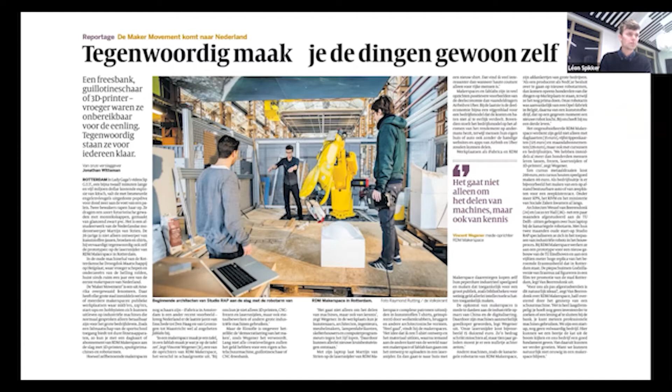And even though I've moved on to new things 2 years ago, I still think these guys are really doing great work, and I would recommend anyone to check out their stuff a bit later on, or if you're interested in doing an internship or working there, to get in touch with them. So let's run through some of the projects to show you what computational design and robotic fabrication can do.

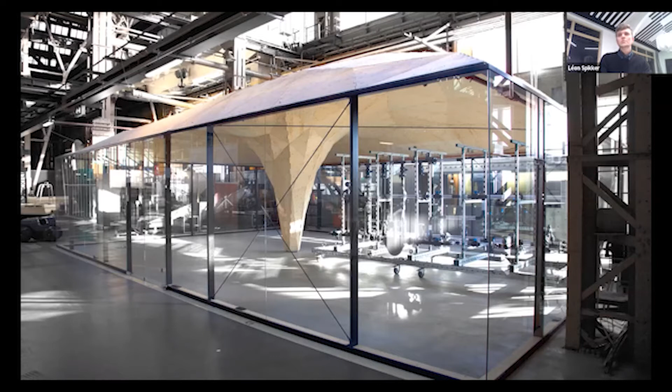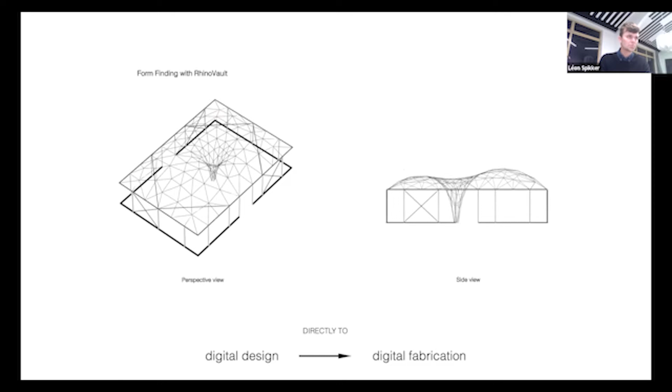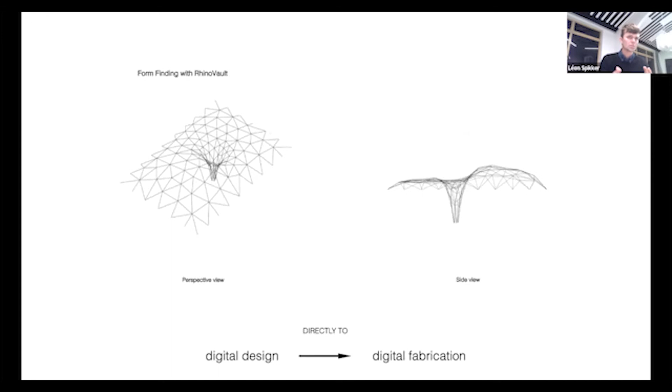The design and fabrication had to be tied into each other. This is sort of the dogma that we worked within, where the roof is generated from a shell structure and then rationalized and brought back into panels that could be milled with a robotic arm. You can see that here in the video. So really the structure and the material go hand in hand here.

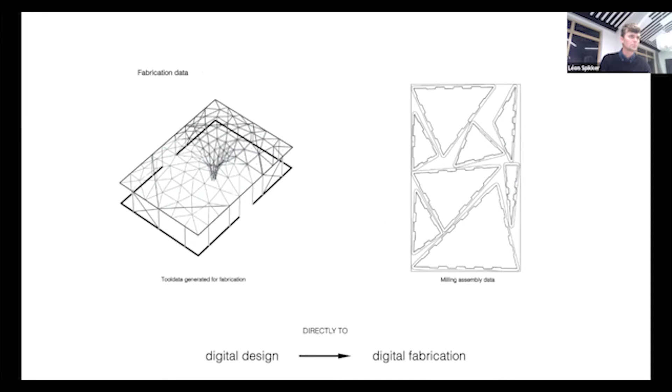So the structure is generated using RhinoVault. It's a plugin from the ETH in Zurich to create compression-only vaults. And the system relies on the traditional finger joint for improving structural performance and easy assembly.

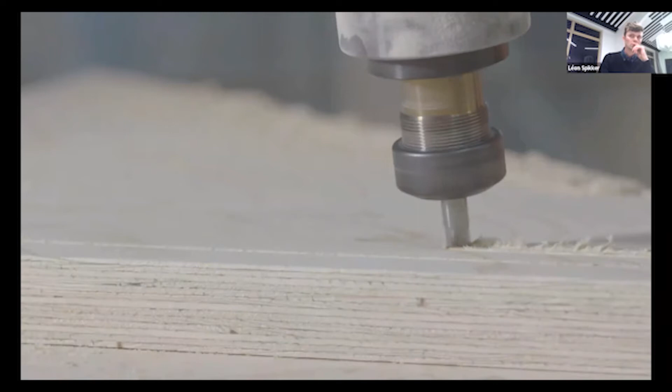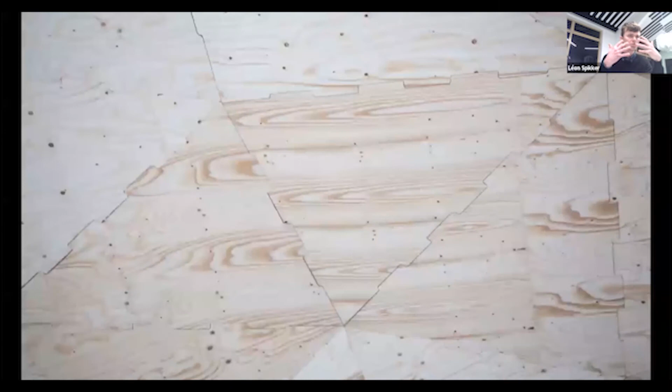We produced it ourselves with another second-hand robotic arm that was suitable for milling. We milled about 350 unique panels that together create this load-bearing structure, where the veneer of the wood is aligned with the highest resistance to stress.

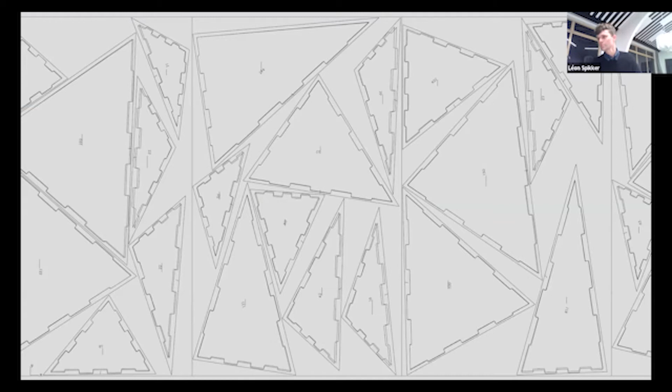That's also how we aligned the panels that we made within the stock material that we bought. So all of these things were done computationally directly from a parametric model of that vault. It took us a couple of months to manufacture and then assemble into this domed structure.

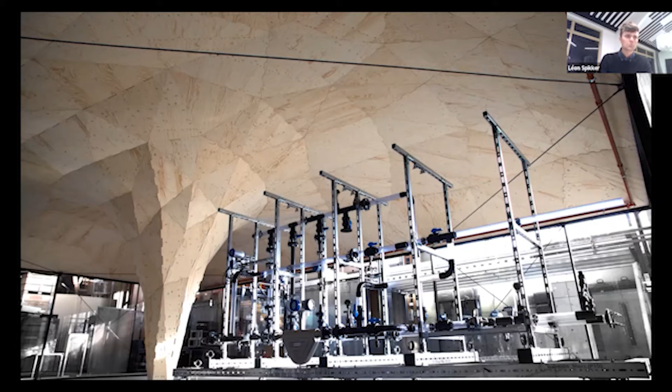The result is really quite a small building, but for us it was the first project in which we could actually prove that there's a huge potential in combining designing and making into one firm, and also bringing manufacturing forward into the design process - taking these constraints and material properties into account when designing, so not leaving them as an afterthought.

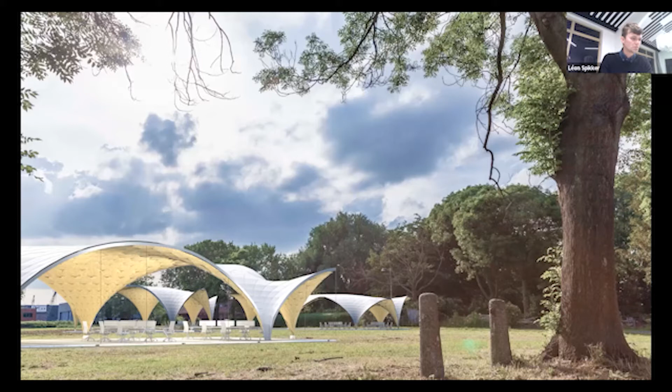This is a project that we did for the Port of Rotterdam Authority, and they had another project later on. This really showed to us that these digital tools are not just nice because they have an undo button or it's easy to make changes, but also that these algorithms can be applied to new cases with relative ease.

So what you see here is another project for the Port of Rotterdam that unfortunately ended in the sketch phase, but we could easily whip up using the same algorithm. It showed us that there's value in creating a sort of toolbox of codes and of methods to design and produce.

So we went looking for a good way to approach that, and we found that during the making of their load-bearing structure, there was actually a lot of waste material lying around. It was left at the lumber yard, but marked as trash, and had quite a negative effect on the circularity score of the project. So we thought it would be nice to use that larch and pine in the cladding of this project.

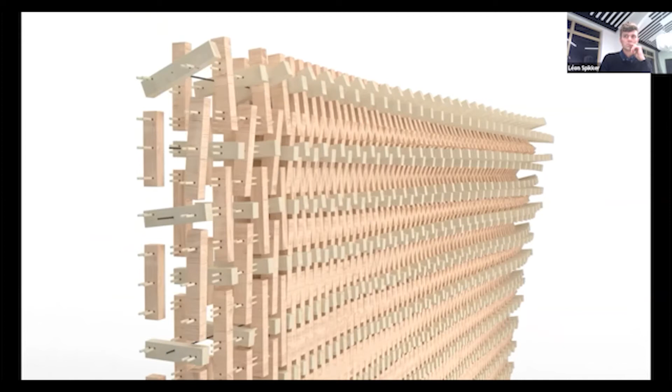So we devised a system that consists of traditional detailing, but not with finger joints, but with dowels - so without glue or screws, and actually just with wood and just a post-tensioning rod to keep these panels together.

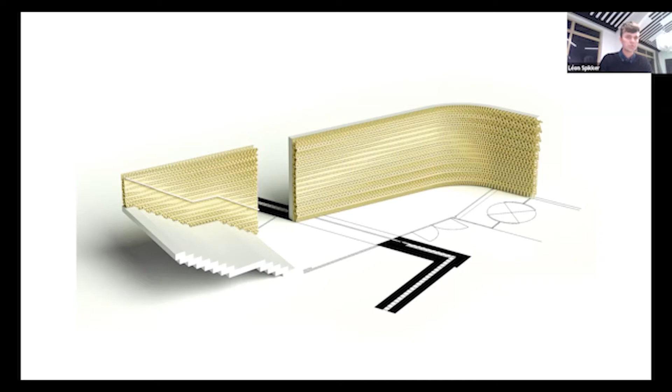Together, these panels would form a balustrade and wall cladding that would cover the gallery's entrance, and we would use the handrail to influence the parametric design of the wall cladding. So for us, this was really a way of pushing our control of robotic manufacturing to the limit. We went all out and devised a robotic fabrication process where the robotic arm, as a craftsman, handles these small battens of wood and goes through a couple of actions and then positions them on the right spot within this segment.

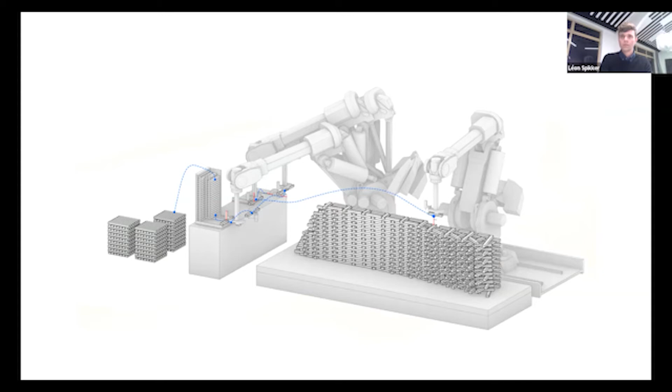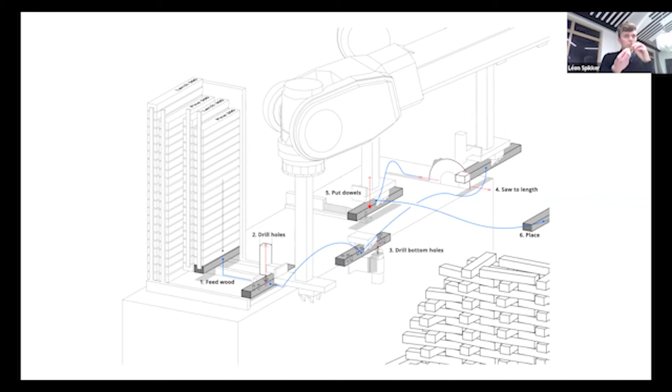So you can see that process here. It involves around 6 steps with different pieces of larch and pine, either 50 or 30 centimeters long, where they're drilled from top and bottom, they're sawn to length, dowels are introduced into them, and they're then placed on the right spot.

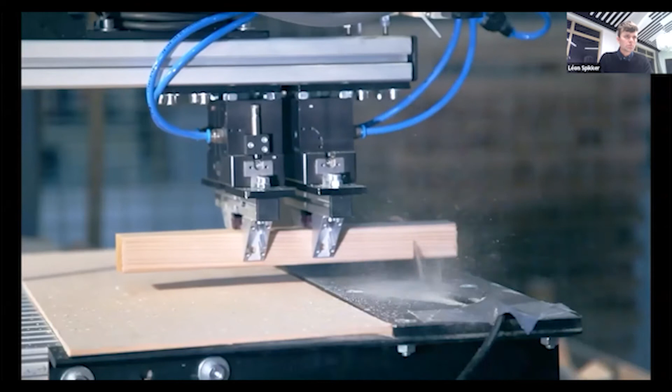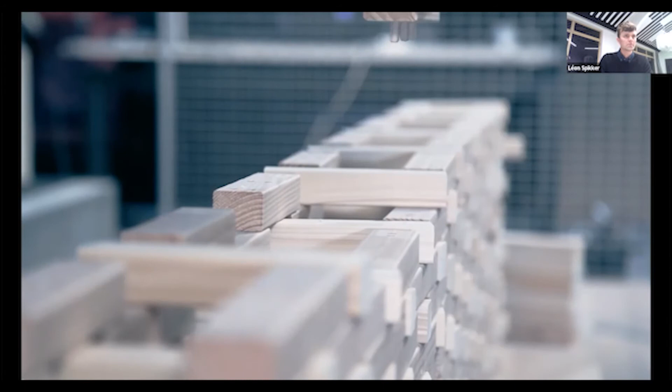The tools that you see here were also hand-built by us, mostly because this process isn't used in the industry at all, also because it's pretty laborious. But you can see a time-lapse here. These processes normally took about a day to complete. So the segments that you see in the end here are stringed together and put into the gallery space near the entrance.

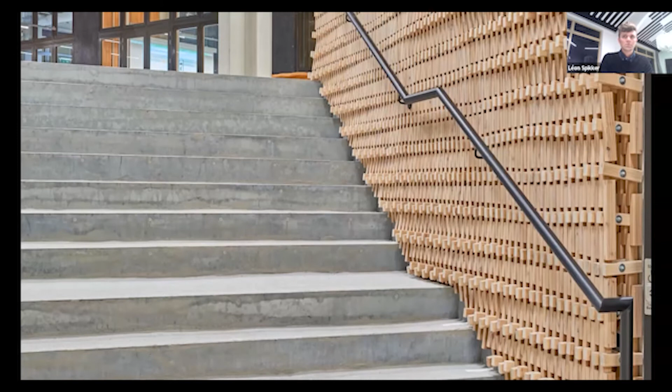And what I personally really like about this project is that it shows that waste as a material for building, or circularity principles, don't have to be boring or ugly, but that they can be used in pretty inspiring and aesthetic ways. So it's a unique piece of architectural cladding, which really wouldn't be possible without the tight integration of computational design and robotics.

So on such a small project, we really pushed what could be done with such materials, but we were ready to move on to some other materials as well. People really knew us as the guys who only work in wood. So when BPD Development approached us for a project, we didn't hesitate and hopped on it.

There's a project called New Delft Blue, where we were asked to design a couple of archways into a communal garden of a new residential complex. Delft is a historic town in the west of the Netherlands, known for its Delft Blue pottery, as well as the technical university where we had all graduated.

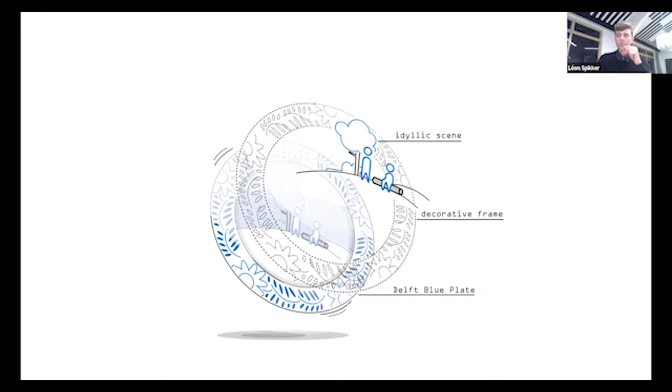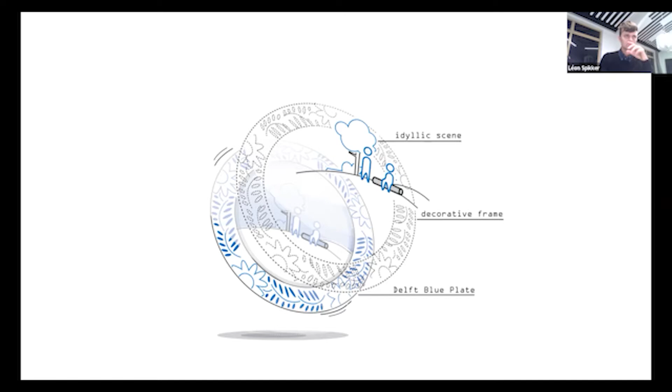We decided to reinterpret those two factors in the design. We started with the structure of the iconic Delft Blue plate, which contains a decorative frame, often natural or floral patterns, and then an idyllic scene in the center. Within the project, the gates actually already framed the idyllic scene, which is the lush courtyard in the middle.

So what we wanted to do was use the arch as a decorative frame for that, to guide the viewers inward, where we would make ceramic panels, 3D print them from clay with our robotic arms, to create a unique gate on every side of the building block.

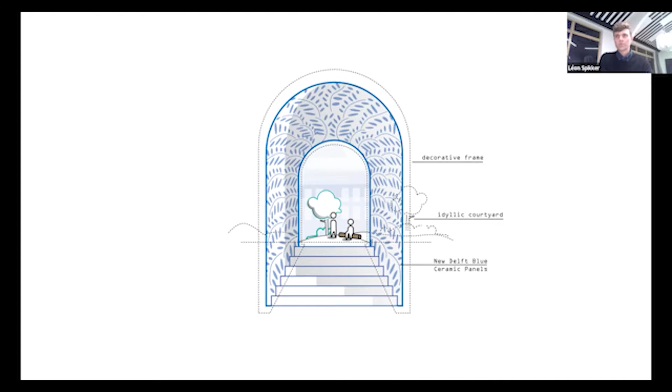So here you can see what that looked like. It's a custom extruder that prints panels of about 30 by 50 centimeters high. And all of these tiles could be produced uniquely. It doesn't really matter whether with 3D printing you print 1,000 times the same panel or 1,000 times a unique panel — the production time is pretty much the same. It's just in the robotic control and the design where you have to make that differentiation.

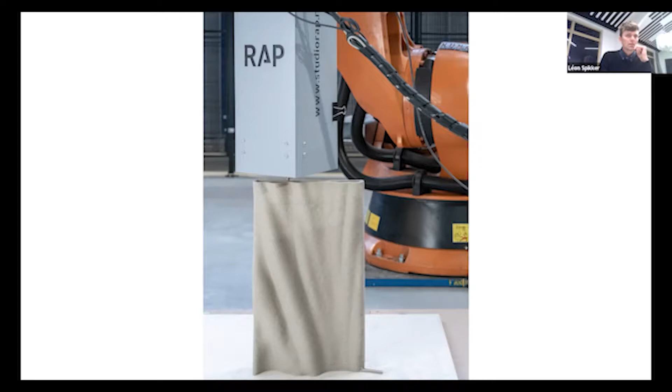So what we wanted to do is use that cheap form, or the way that we can achieve that form, to paint this floral pattern. Together with Royal Tichelaar, a very famous ceramics company in Holland, almost one of the oldest companies here, we developed a runny glaze that we could put on the tiles, and that would run into the valleys in between these hills that you see. We wanted to do that to create a sort of halftone effect between blues and whites, so we wouldn't have to hand paint the tiles to achieve this differentiation — the form and the runny glaze would force this effect.

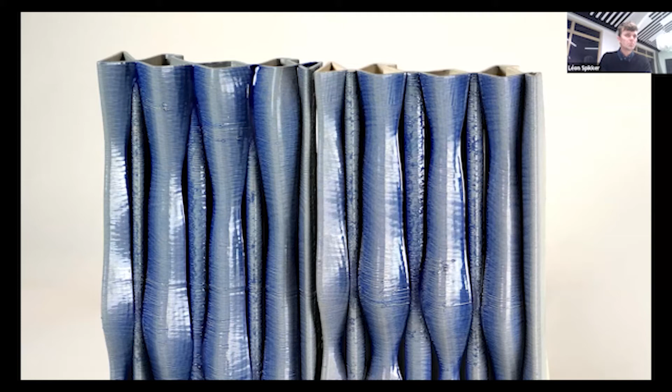And you can see that in these early prototypes that we made, the effect is quite visible and striking, and there is a nice accentuation of the print layer as well. So there's multiple layers of expression in it.

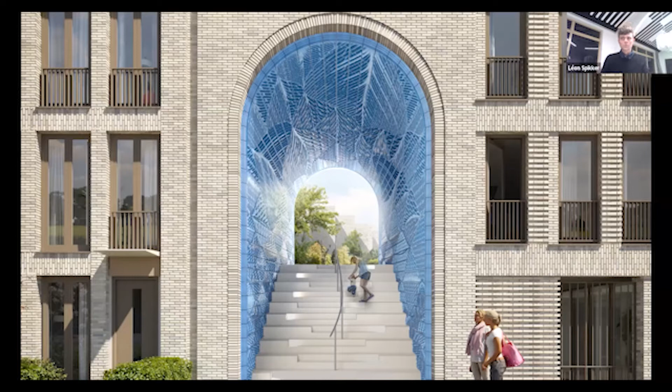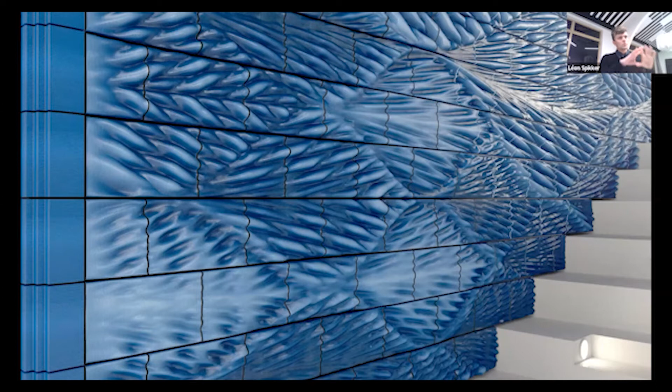For the overall design of the arches, we went with the floral patterns from Delft Blue, as well as some cues from the nearby waterways and canals that Delft is very well known for. It's just used to accentuate the entrance to these shared gardens. Here you see a detail shot of how these panels would be lined up, and how each of them uniquely contributes to this overall image.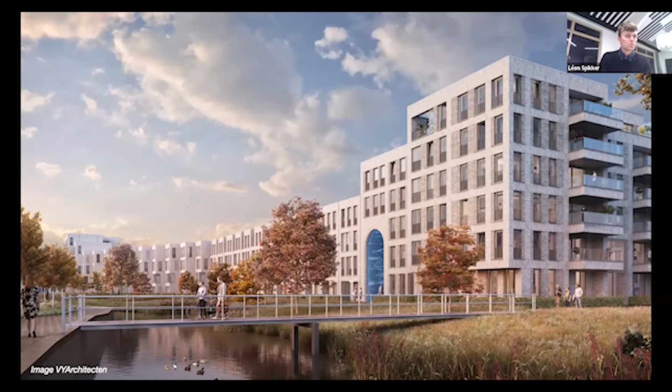So here's an outside shot of that building block and the small archways, and how it looked in the end.

So from that project on, we realized that we didn't just want to do aesthetically pleasing additions to existing buildings, and I was quite enthusiastic when we were asked to work on bus stops. This isn't really the thing that most architects would consider challenging or interesting, but with my background in industrial design, I thought that designing products for public space is actually a pretty neat thing to do.

What we wanted to do was look at how we could contribute to society a bit more with the tools that we had developed. So the assignment was focused on turning the generic bus stop in the Netherlands, which is quite a depressing place, into something more comfortable and large enough for the amount of users that actually use it.

So bus stops are maintained by, or placed and maintained by, advertisement companies, and they're not really interested in that. We found out that the physical infrastructure has a really big effect on bus usage, and that these low quality bus stops were actually keeping people out of buses and in their cars, where the province wanted us to do that the other way around, so get them out of their cars and into the buses.

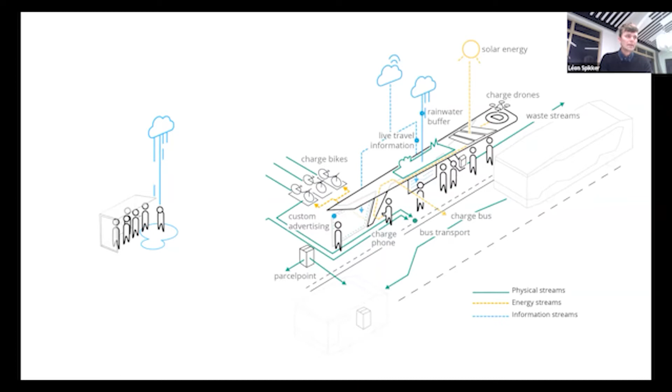And this is where we started thinking about the idea of a family of bus stops. So a design system that could adapt to all kinds of positions - rural, urban, suburban, anywhere in between, where services and amenities could be adapted to that specific location.

Rural stops would get electric bicycle charging or package lockers, while urban stops would be more compact, but had more information on what could be done in the surrounding environment, for example.

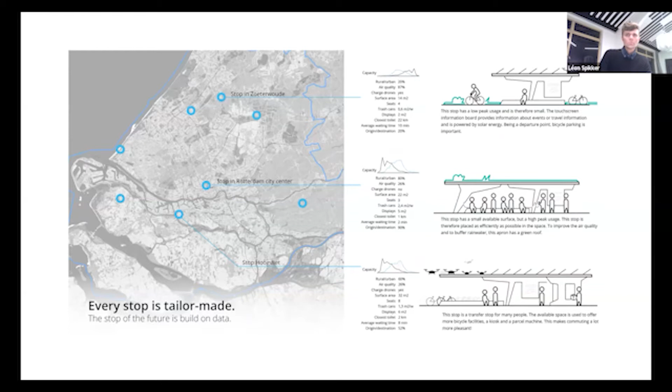We had a good test case on a plot near the Erasmus University that saw really large peaks in the morning and afternoon, but in the middle of the day, almost nothing happened. And this design system would adapt to that narrow plot and still cover about 350 people per hour.

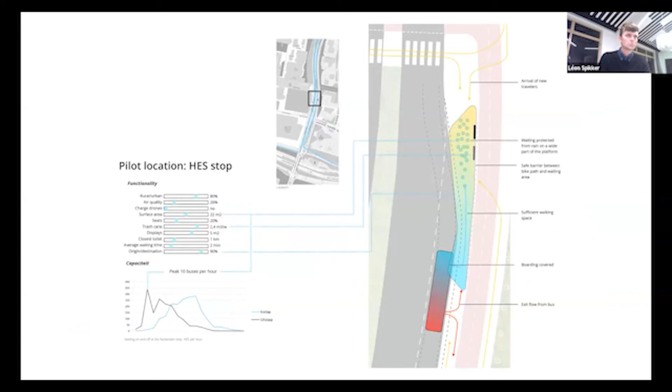So really big change. And we made a couple of modular and adaptable designs that could be made using robotic manufacturing methods. And they could be produced in different sizes for these different sites and containing these different amenities and services.

But unfortunately, when that bus stop got moved because the contract with the bus company was ended and the local government changed, the project fell through, but it put us on an interesting path because it brought us another project, which is the last one I'll show from my period at the RAP, but which is the 3D concrete printed Abri, which is also a sort of bus stop, but this time for the city of Rotterdam, so not for the province of South Holland.

And it wasn't about buses, but about water taxis. And they sort of stitched together the two sides of Rotterdam, so the north and the south. Rotterdam is cut by a river. And they also wanted to promote the use of that way of transport.

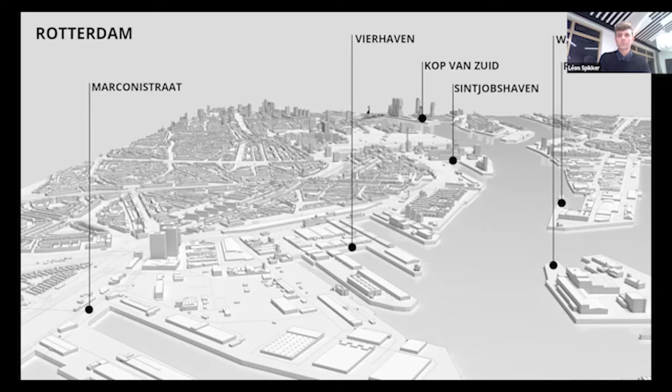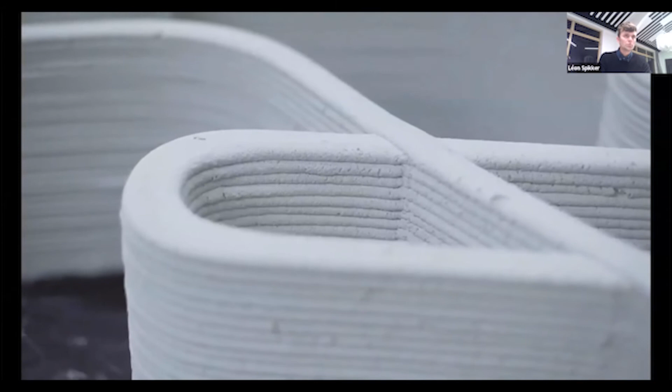And during that time, we had just started working with Bruil, which is a large concrete manufacturer that was starting to use an experiment with 3D concrete printing. We had been working with them to develop some software for them to do that. They had seen our project with robotics, like Circular Experience and Scaled In, and had asked us to make some first software tools for them.

And we wanted to apply this new technology in a project, because similar to the ceramic 3D printing, you could make unique objects at pretty much the same cost as you would a mass-produced one.

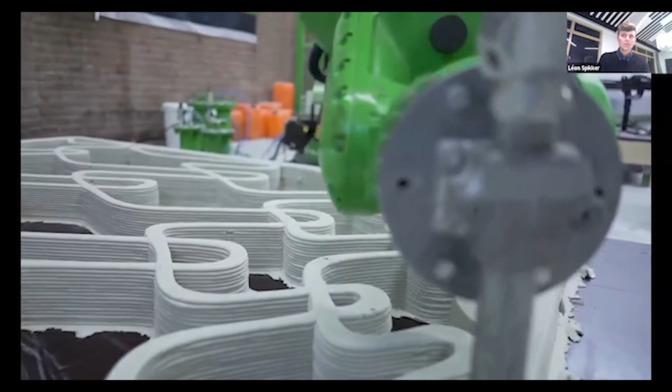So then the design for the water taxi was a model that we could use to generate unique coverings for every stop from one single parametric model, where it would always cover plenty of space for the amount of people that will wait on that spot.

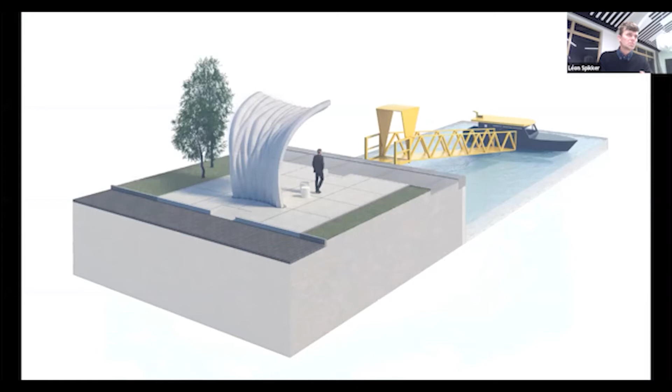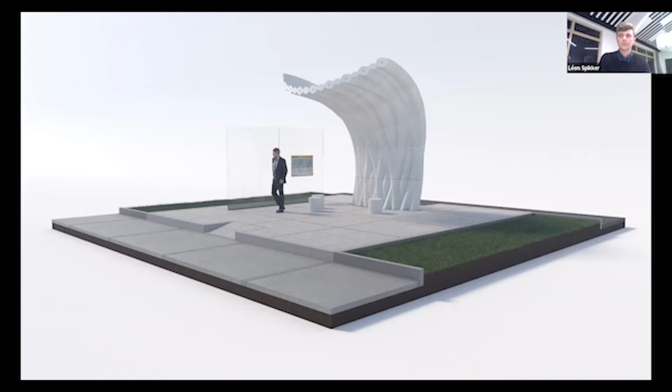The design was rather straightforward, so a cantilevering concrete shell. But in 3D printed concrete, that can provide quite a challenge, because it's still almost impossible to incorporate rebar into 3D printed concrete. So it's something that hasn't really been solved yet.

But we circumvented that problem by designing a post-tensioned hollow concrete shell that would consist of multiple 3D printed parts held together by steel tension cables that you see in that video there. It would sort of pull together that structure a little bit like the tendons in your hand.

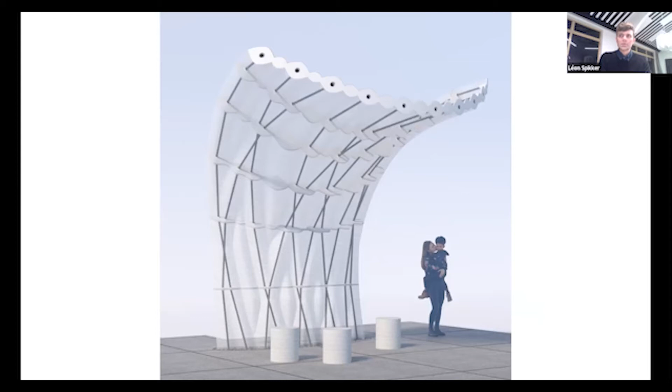It was quite an experimental design, and because of its public use, also had to take into account all kinds of severe abuse and the notorious soccer hooligans we have in Rotterdam. So we had to make a prototype that could withstand all of these influences.

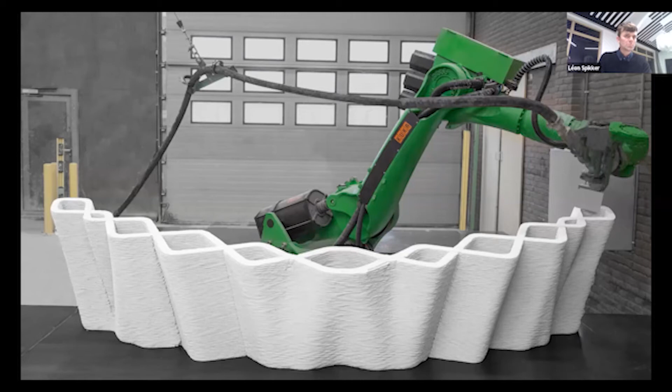Here you can see the robotic arm that's printing one of the bottom parts of the shell. We had to revise the design quite a couple of times, because the production capabilities of these machines and of this concrete were really limited still at that moment. But what you can see here is that there are hollow channels through which these tension cables would run.

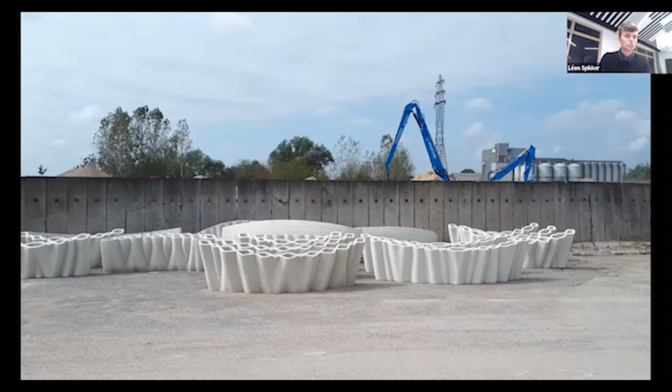So these are all the elements that you need to produce that mock-up, which was then assembled in a week or so. This is the first prototype we made for it.

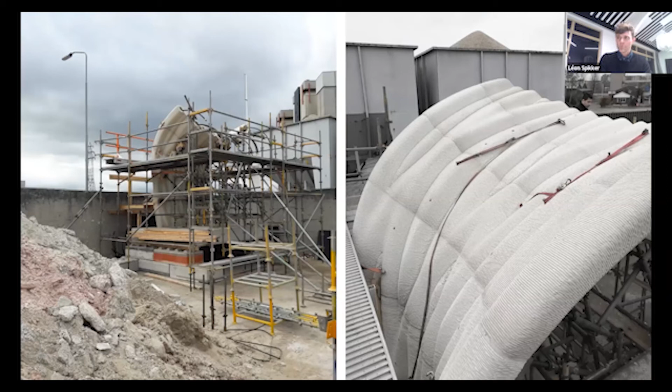We actually discovered that even though the printing of it was quite straightforward, it needed extreme amounts of scaffolding and tooling to keep it in place before it was post-tensioned. So the temporary bracing was really something we hadn't foreseen at the beginning of that project.

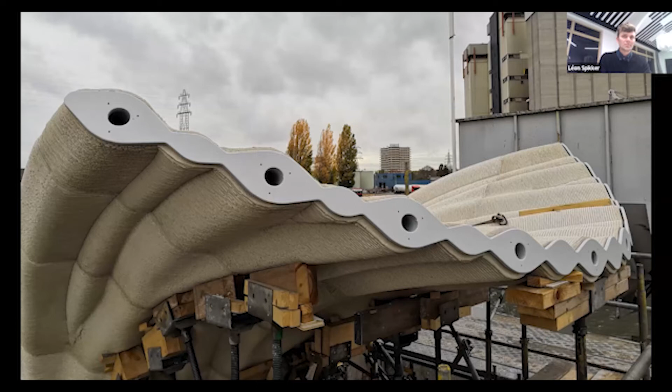Unfortunately, we tensioned this prototype after adding this large steel plate at the top, and during the tests, the entire prototype exploded because of the tensions that apparently weren't calculated properly. It showed us that this technique was actually a little bit too early to put into the public space.

But what these last two projects showed, these projects for the public space where we were thinking about families of objects that would come from a central parametric design or a design system, was that there were more ways of applying computational design and digital fabrication than just doing decorative coverings or developing these procedures ourselves.

So that kind of got me thinking, and halfway through 2020, I decided to quit at RAP, because I had worked on a design for a villa for 4 years, which was a beautiful chance to do and a beautiful project.

But as a millennial, I thought that working 4 years to house 4 people didn't really scratch my itch to have an impact on our society in a positive way.

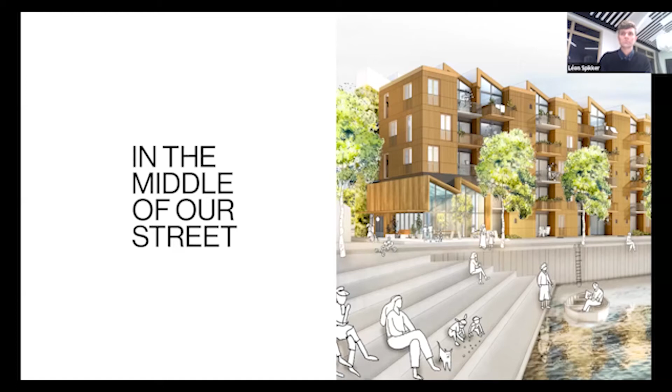The focus of MOS is on affordable housing. So this is like the missing part of the Dutch housing market, where low and middle income families can rent apartments. And MOS tries to do that with a diverse set of floor plans, so that suit a diverse range of people.

Currently, social housing is often designed with a standard 2-bedroom, 70 square meter apartment, which is too big for a lot of people who start out and too small for a lot of families.

But since the waiting lists are so long, people just take it and then they will just use that extra room for storage or whatever. But it's a very inefficient way of clearing that waiting list.

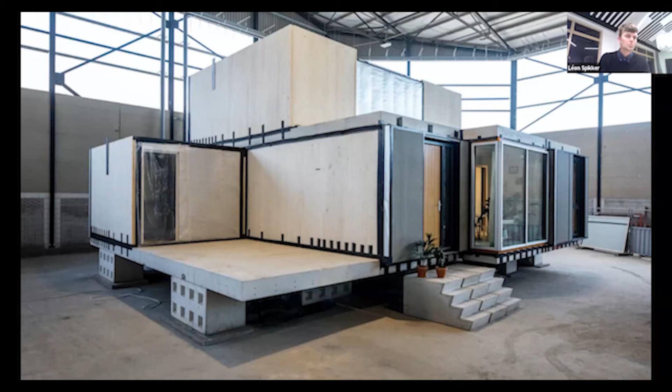A second important aspect is that the design consists of a structural hybrid. Where you currently see a lot of building systems that are only concrete or only timber, this actually uses a recycled concrete floor made from recycled cement in combination with cross-laminated timber walls.

And the idea behind that is that the concrete floor actually solves a lot of issues in stability and acoustics, adds a bit of thermal comfort, but also that you can build these really, really quickly.

And often these projects are put in a plot where previously a 70 or 60-year-old building has been torn down, where a lot of waste concrete comes out of the project. So we try to bring those resources back into the project that comes in its place.

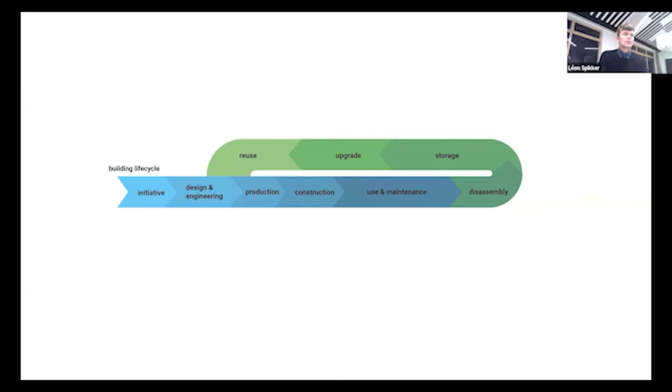To support this much more integral process, we have to augment it with a digital chain of solutions. I don't want to make it too complicated, but that makes it possible for partners and clients to maintain control over all these different phases we're going through, and to see where projects are across all these phases. So you can see when a project will come back for disassembly, or whether it's in the use and maintenance phase, or just in design and engineering.

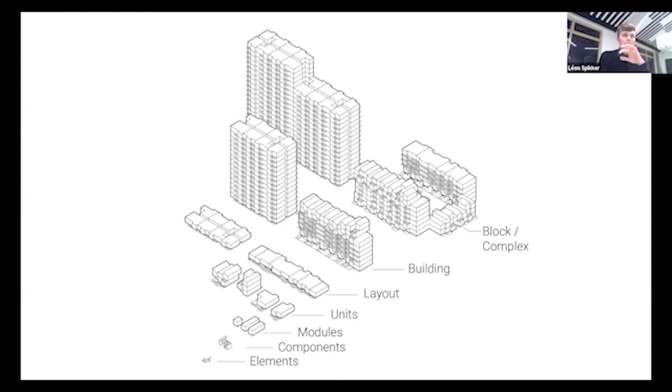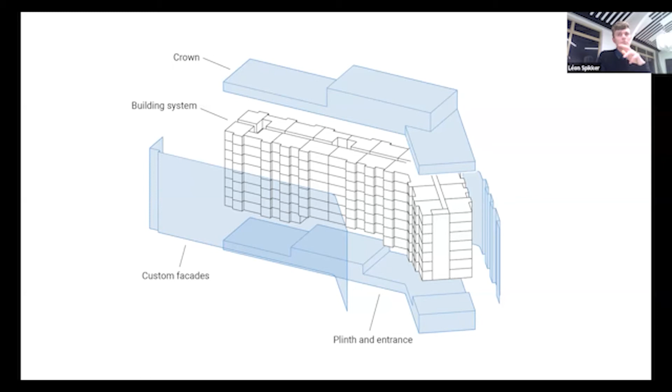The idea behind it is that our building system will cover the part of the design that can be optimized relatively easily, and leaves the part where architectural expression and the individual character of the building, also for the local surroundings and urban quality, to the specialist architect or local architect who knows what fits best in that situation. So if we're talking about this modular system, what's that module?

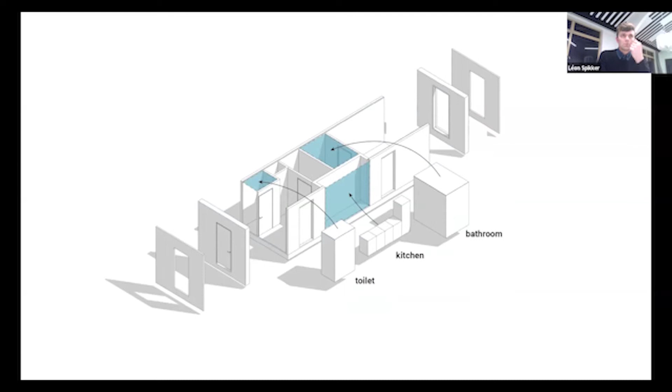Every unit consists of at least one module, the basic module, which contains a toilet, kitchen, bathroom, and the entrance. It's about 3.5 by 10 meters long. Additionally, there's a personal space, which is pretty much a void module that can be arranged by the users themselves, leaving a lot of space for personal interpretation.

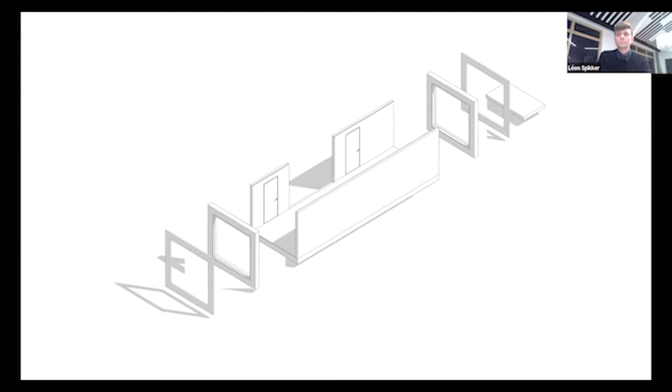Together, these form an apartment. In this case, it's an M apartment, which consists of 2 basic modules.

These modules together can form around 14 different floor plans that are divided into 3 or 4 different building types that can be served, ranging between 25 to 163 square meters. So you can see that a very wide range of floor plans can be realized in that way.

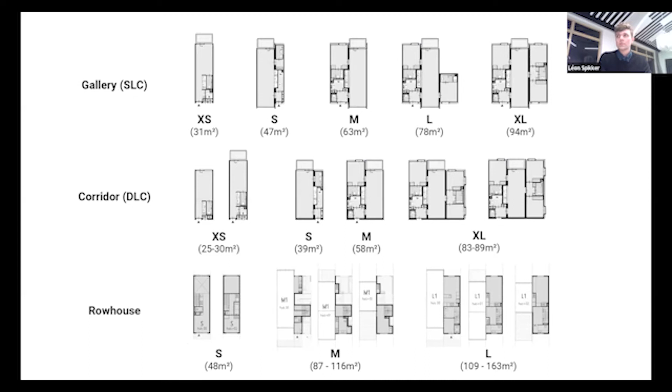And the typologies that we can realize with that same system also has a lot of variation in it. So you can have a row house on the left, a single family house. You can have a single loaded corridor building, a tower, or a double loaded corridor building on the right.

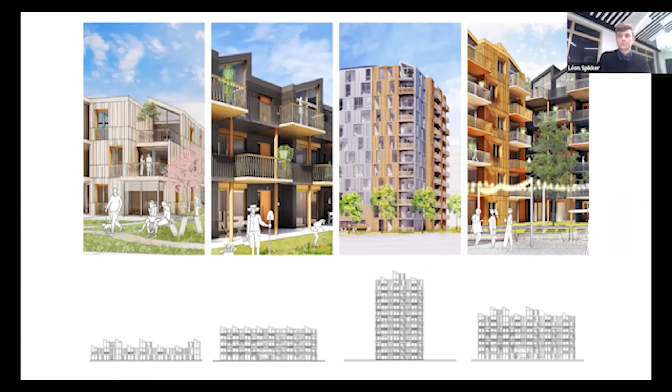And it allows us to create blocks with a lot of variation, a lot of space for different target groups, different tenants. So a lot of diversity within a single block.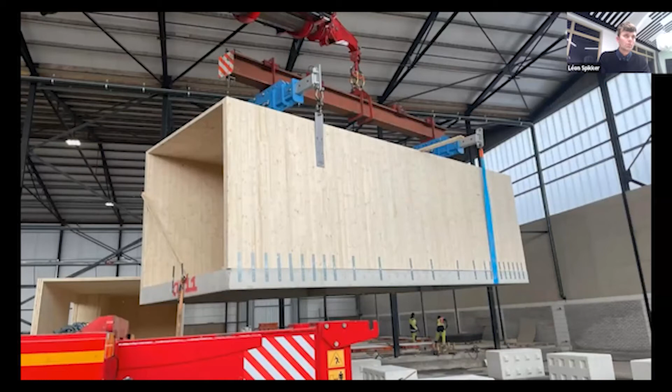So the mock-up that we built of this, you can see here. It's a concrete floor with a CLT structural system on top of it.

And these free spaces allow for a lot of space on the inside. Because the kitchen that you see on the right is actually in the module that you're not standing in, it leaves the full 3.2 meters of free living space in the middle. This is really something that's uncommon in modular homes, so the quality of living in these is quite high for a product that's designed for social housing and middle income housing target groups.

So this mock-up, if you're in Amsterdam anytime soon, you can still see it. It's in Zaandam, just above Amsterdam. And you can see there's no facade on it because it's a white label housing solution.

So the idea is that we as a company don't want to build 1 or 2 buildings in the coming 7 years, but we want architects to pick up this system, to design with it, and then have our partners manufacture it. We don't have one large factory, but we just have an assembly hall where we put together the parts that our partners manufacture.

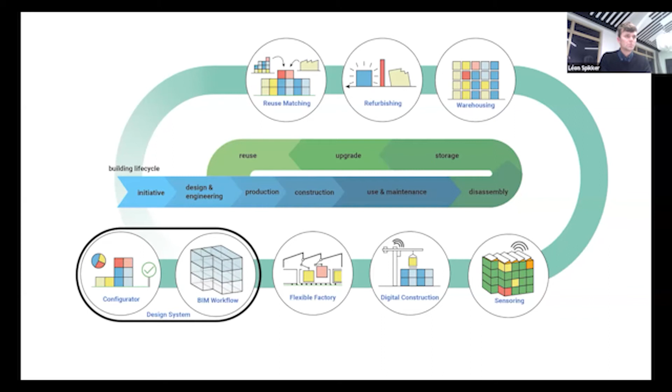And I think it shows what computational design and these design systems can do, is it can actually bring the complexity of such a system into the hands of a relatively untrained user. So here you see a recording I made this afternoon.

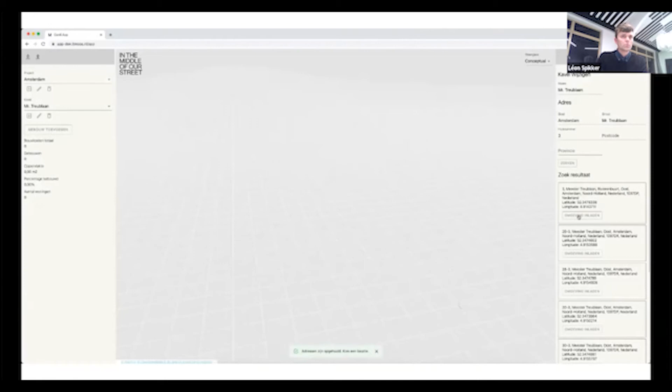So the app is now also being used by some of our clients, and we're adding an address in Amsterdam, it can be any address in Holland actually, and it loads information from the government database for geomatics, so addresses and parcels. You can select the parcels that you want to build on or that you've bought, inspect some information about them, for example zoning restrictions.

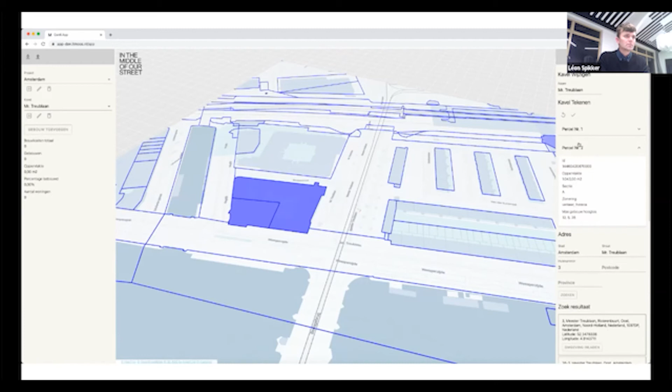And after you've done that, you can start thinking about what kind of buildings you want to put on top of it.

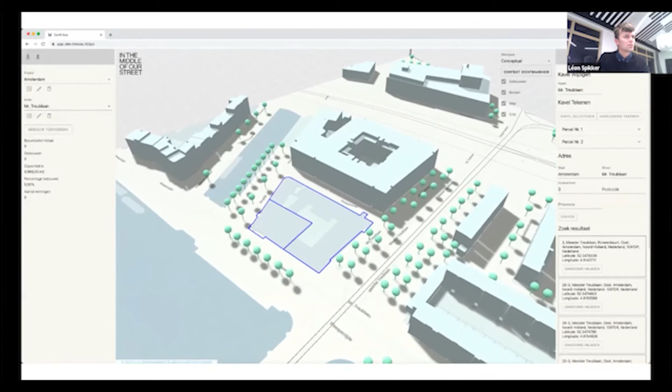So the tool has been built in the past year together with Matas Ubarevičius of Bit by Bit Developers. He's a software developer that we worked with a lot also in my time at RAP. And we decided to build this ourselves because we didn't find a solution that actually fits modular housing.

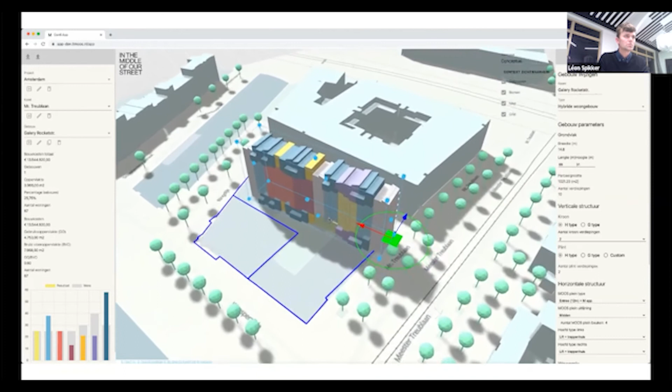So there's a lot of design tools like these out there, but none of the solutions that come out really have a price in them that makes sense. So on the left, you can see that as you manufacture, as you design and configure the building, the costs on the left side increase or decrease depending on what you're changing.

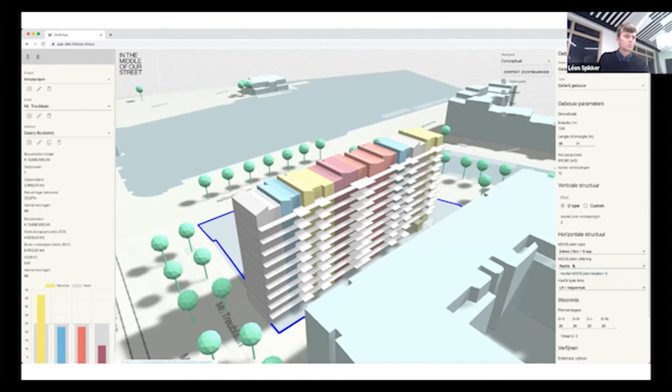You can change where the entrance of the building is, how large it is. You can change what types of heads you want, so the endings of the building. And what this really is, is a feasibility study, a technical and financial feasibility study for corporations, social housing corporations, and developers.

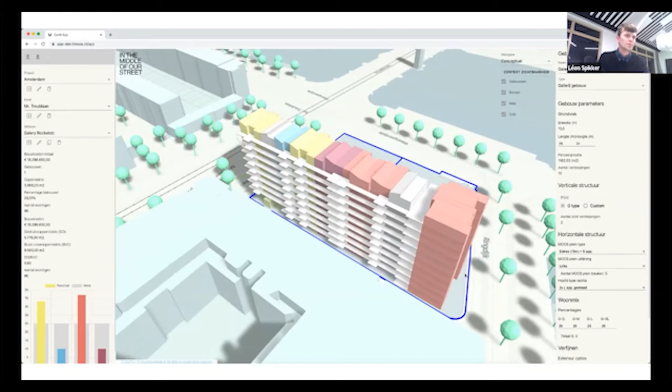That's available for free. So where normally an architect would take about a month or 2 months to develop such a plan, now these clients can try it out themselves and come up with a very basic feasibility study, to then continue into a design process within MOOS, but then with the help of a local architect. So I'll skip this forward a little bit.

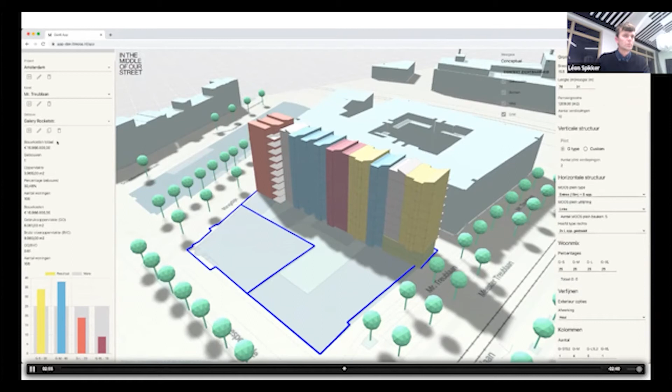So here we're adding some row houses. It contains all of the typologies that the building system entails. There's not really any limitations to that, and we try to continuously update it as we make changes to the system, so it's never really outdated. You can change the type of plinth that you want in the building or the type of crown that you want on it.

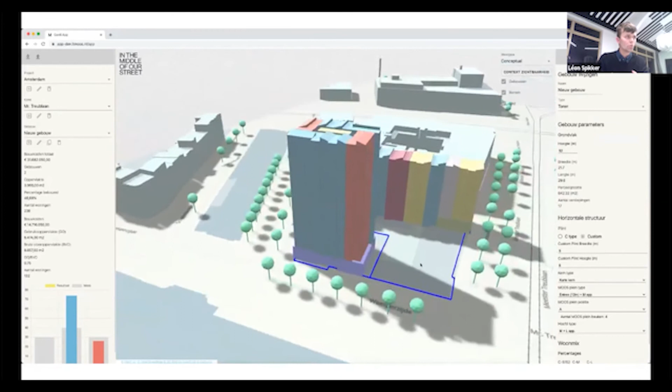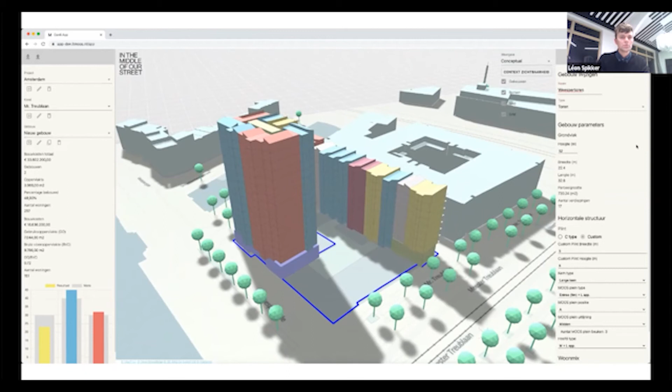And all of the metrics that you see on the left change with it - the building cost, the GFA and UFA ratios, the amount of units that you're realizing. We believe that by putting these kinds of tools in the hands of the users, we can lower the threshold of using these systems and reduce the complexity of use, which would normally require experts to handle. So all of the complexity has been hidden on the back end, and we've reduced this building system into this sort of Lego-like configurator.

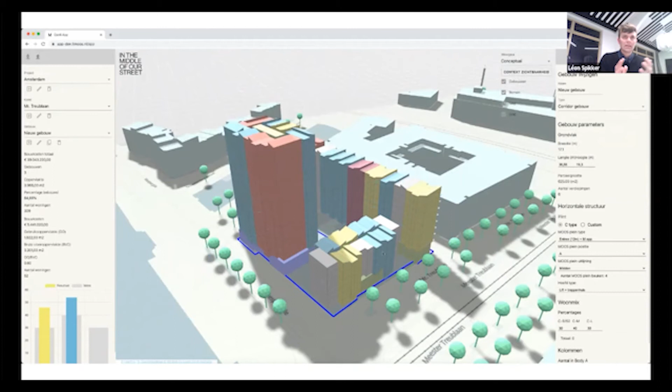So I think with that - playing with it for a little bit more - but I think with that, what I want to show you is that the range of what you can do with computational design and digital fabrication is really wide.

It can be a useful tool within a project to design a nice load-bearing structure or a wall cladding project. You can go all in and develop your own manufacturing technologies and go into 3D printing with clay or concrete, but you can also use it to completely rethink the way in which you develop housing for low and middle income families. So I do think it's a really interesting time to be working in this field and to have these tools available to you.

So I'm quite curious to hear what your findings are. And if you're listening to this later, of course, you can also get in touch by sending me an email or reaching out on social media or something. So thank you very much.

Thank you for your lecture. That was really interesting. I hope people can put their questions in the Q&A because I know you covered a lot of really interesting projects and a range of different kinds of explorations of computational design and fabrication.